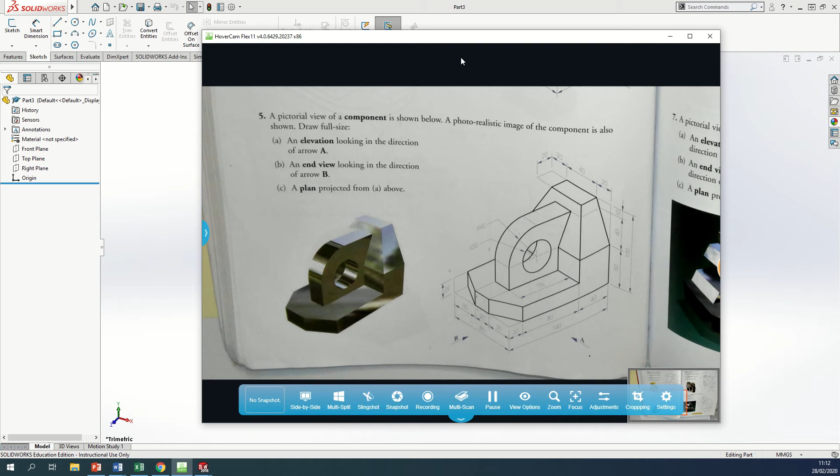Okay guys, so if we open up our book on page 124 and go to question 5, it's an orthographic projection question, and we're going to draw it out in SolidWorks. We're going to start from the base up. We see that the base is 140 by 80.

Over in SolidWorks, looking straight in at the top plane, we're going to draw a center rectangle of 140 by 80. Green tick once we're finished.

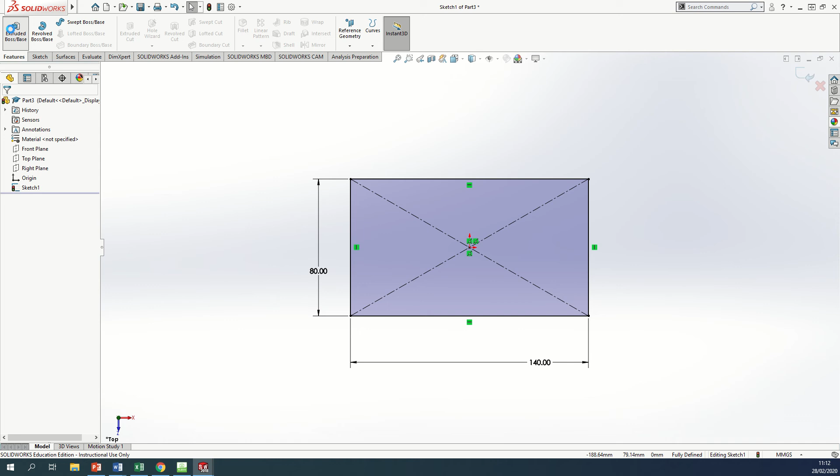Features, extrude up, and if we look at our drawing again, we're extruding up by 20 mil. Green tick. That is our rectangle shape to start with.

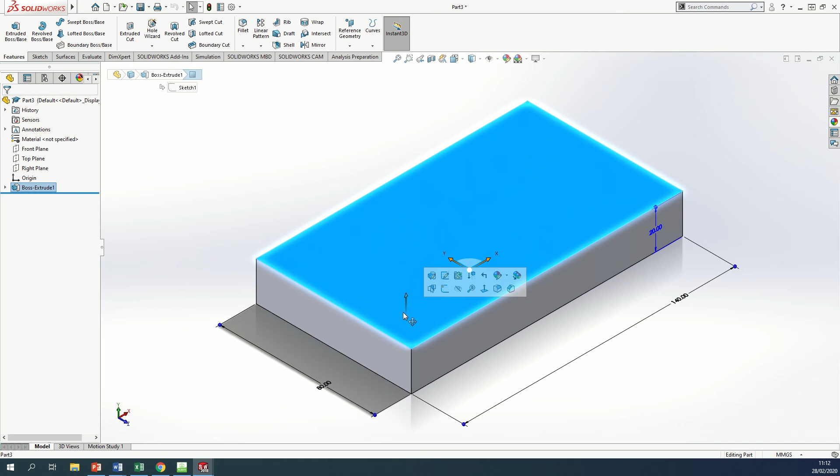The next thing we see here is that there are two corners being taken out. To do that, we have to look straight in at our shape again, and we're going to go to sketch.

We're just sketching a line here, starting from the corner and drawing a triangle. The dimensions of that triangle are going to be 30 at the front on the shorter side, and 20 on the longer side. Green tick once we're finished.

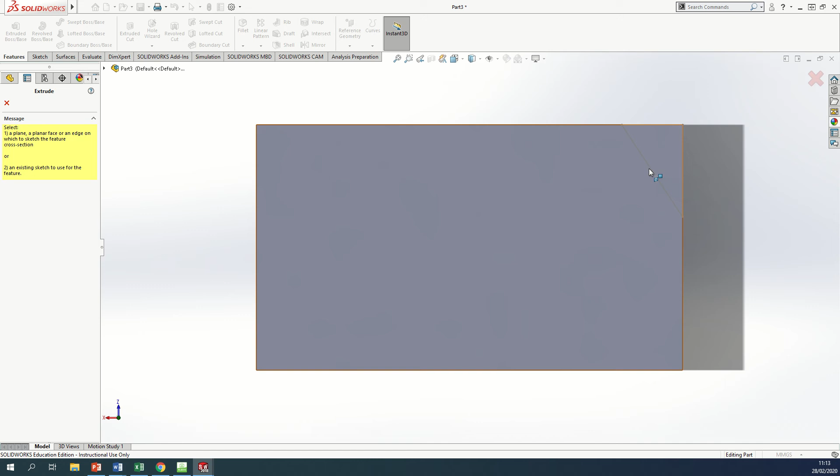Features, and we're going to extrude cut that now, this time cutting through all, so we're going through all of that shape.

Okay, so we've done one side now and we're going to mirror that. So features, mirror the extrude, and we're going to cut along the front plane. Green tick.

And that is our shape so far. Next step for us is to extrude up this rectangle here, so that rectangle now is going to be 40 by 30.

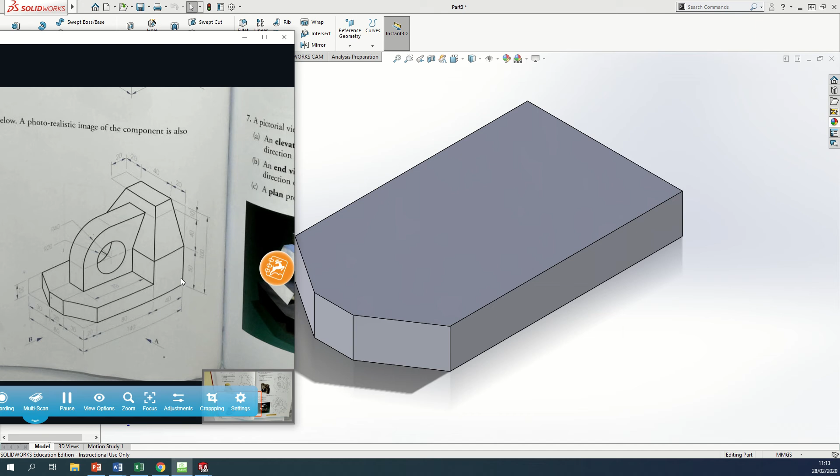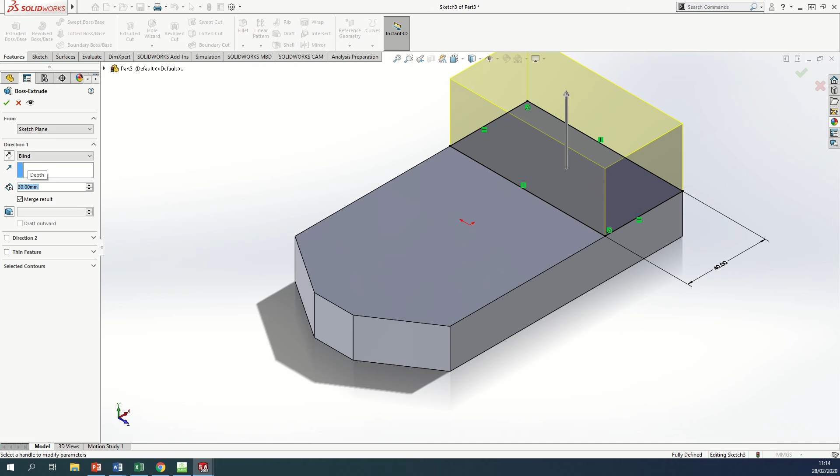So sketch, and we're going to sketch a corner rectangle onto this surface, and the dimensions of that are going to be 40 by 30. Okay, so that's our shape now again.

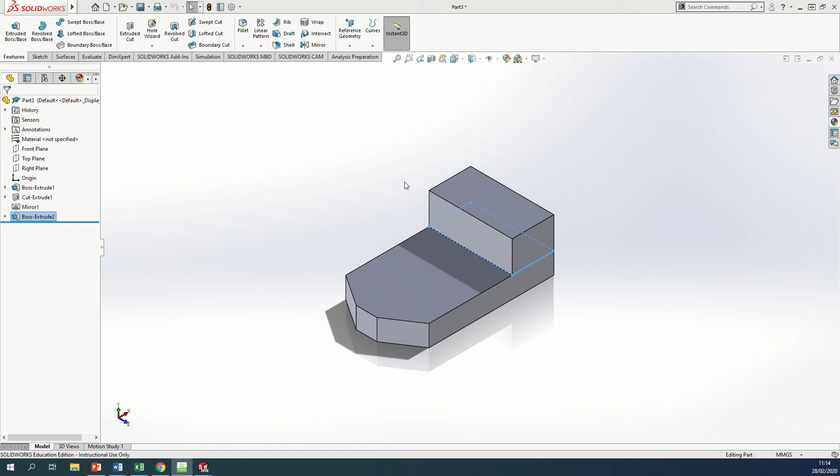The next step for us is to move up here 50 mil and do a plane, and we're going to draw this rectangle on that plane. So we're going to go to features, reference geometry, plane. We're using this surface now as reference, and we want that plane to be 50 mil up. Green tick, here's our plane, and we're going to right click on that and look right in at it.

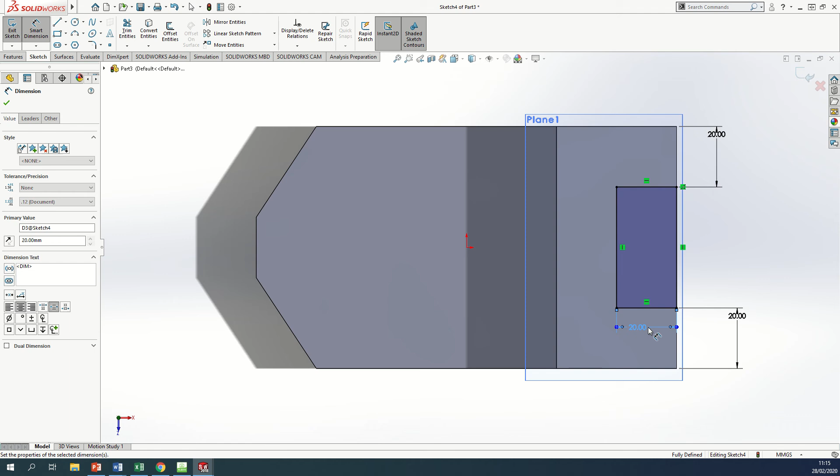On that plane now we're going to sketch a corner rectangle along this line here. The dimensions of that corner rectangle, from this point to this point, are going to be 20. This point to this point is going to be 20 as well, and it's going to be 20 mil out. Green tick, and you can see now that that sketch is just hovering 50 mil above this surface here.

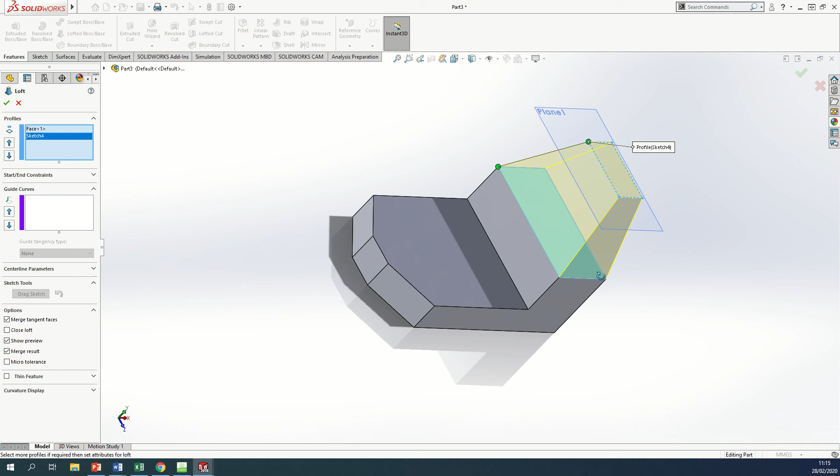Exit our sketch, features, and we're going to loft boss base. We're going to choose this surface and a corner of the rectangle, and we're going to get something like this. This is a preview of our loft, looks like what we want it to look like. Green tick.

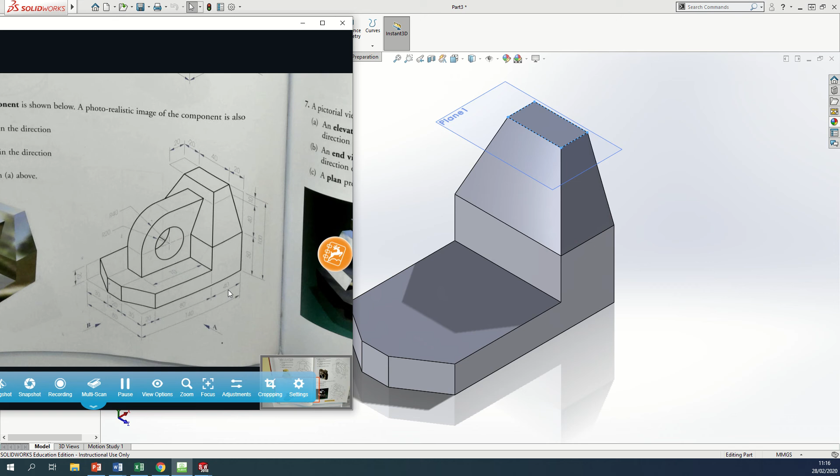The next step now in our shape is going to be drawing this. Now if we looked at our previous video, we should know how to draw this. We're going to have a plane that's going to be referenced off this face, and it's going to come in 20 mil.

So going back to our reference geometry, plane again, off this, flipping our offset. We don't want it to be that side, and we want it to be 20 mil. Green tick, there's our plane. And we're going to go and look right in at that plane.

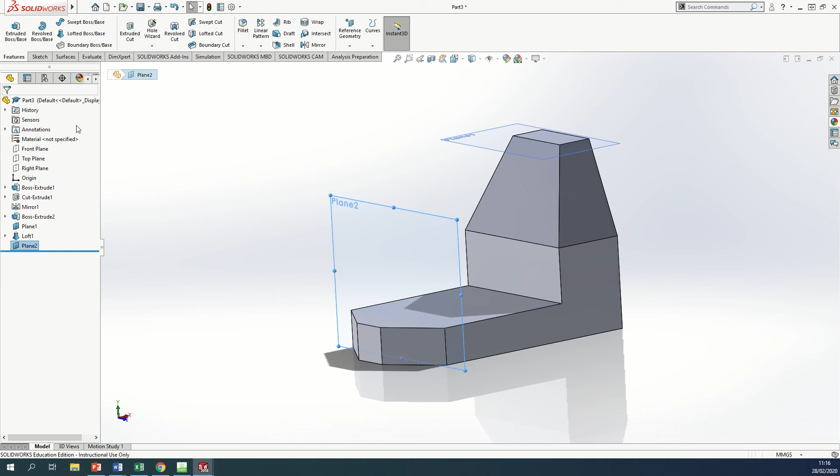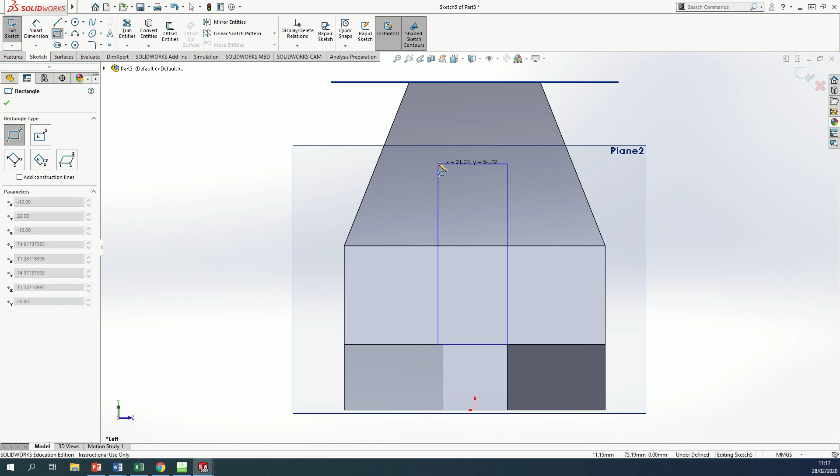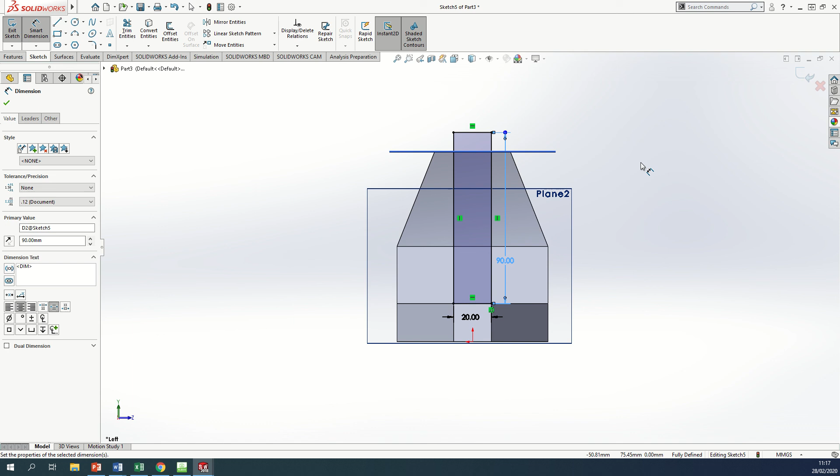Okay, and we're going to sketch onto it, again just sketching in a corner rectangle, and that corner rectangle is going to be in line with this. Smart dimension, 20, by 90. Okay, green tick, that's our sketch there.

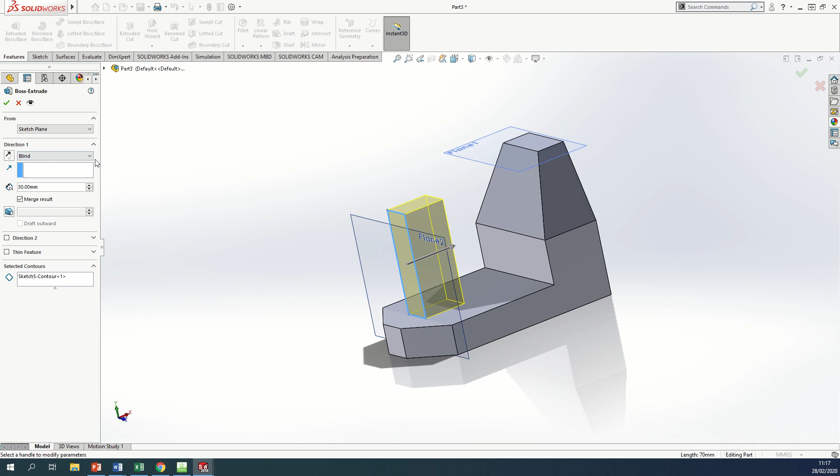Exit sketch, and we're going to go feature extrude boss base, and we're going to go up to next.

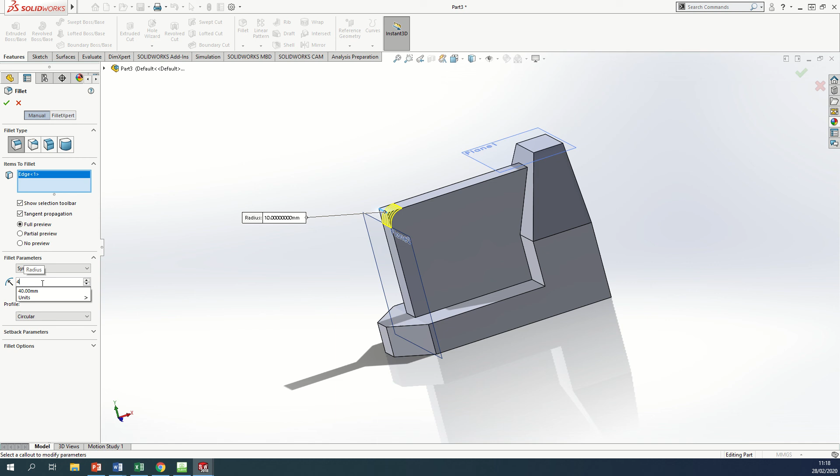Green tick. Next step then is to fillet that, just like the last day, so filleting that now at a radius of 40. So fillet this edge here, and we have a radius of 10, but we want it to be a radius of 40. Green tick.

So right click on both of those planes just to hide them. And the last thing now we need to do is the circle here, the circle cut.

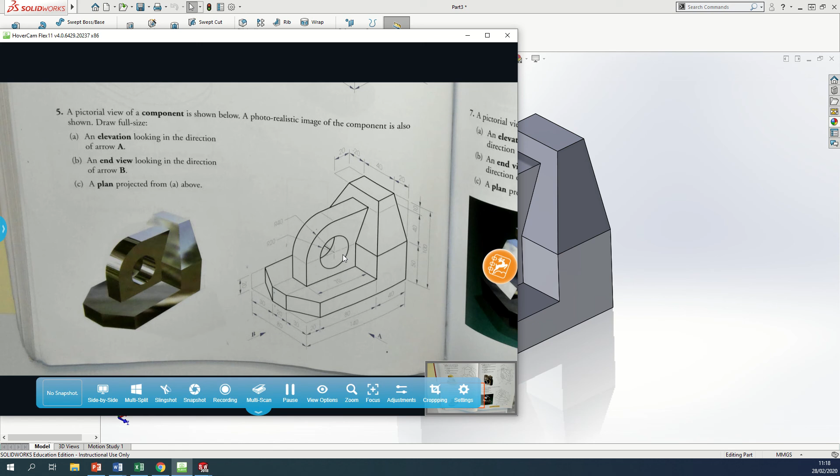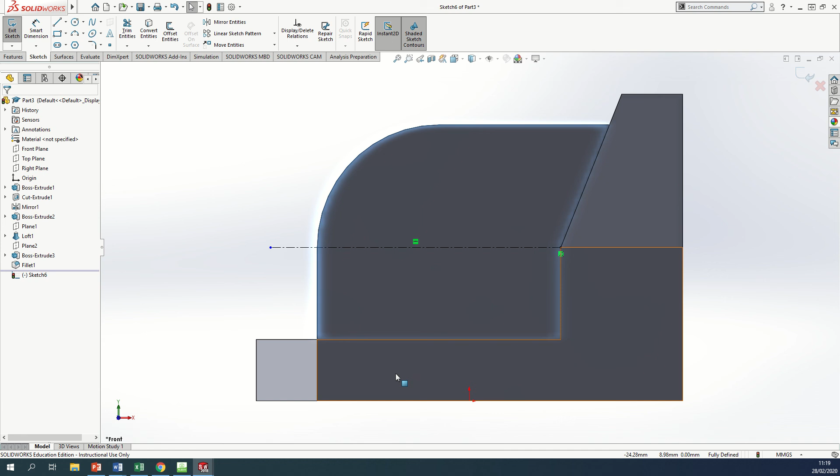Okay, so clicking on the surface and looking right in at it, we're going to sketch on that surface, and we want to sketch a center line to start with. Our circle is going to be somewhere along that line, and the circle is going to be bang in the middle of our shape. So drawing a circle here.

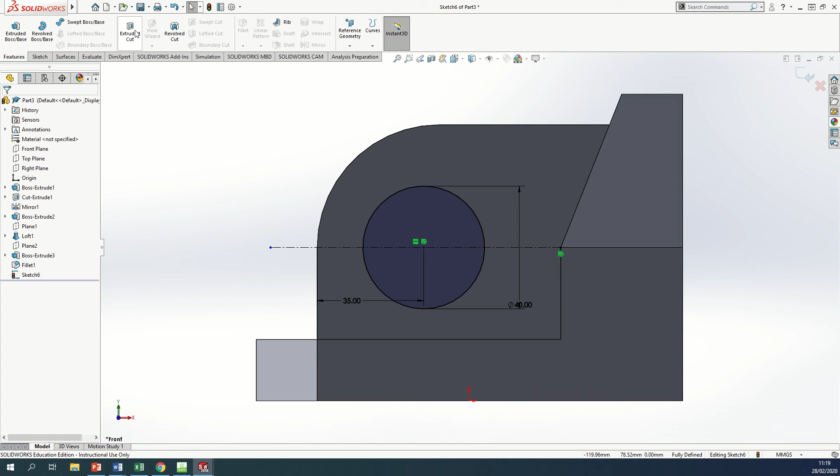From here to here is going to be 35, and the diameter of that circle is going to be 40. Green tick, features, extrude cut, and we're going up to next again. Green tick.

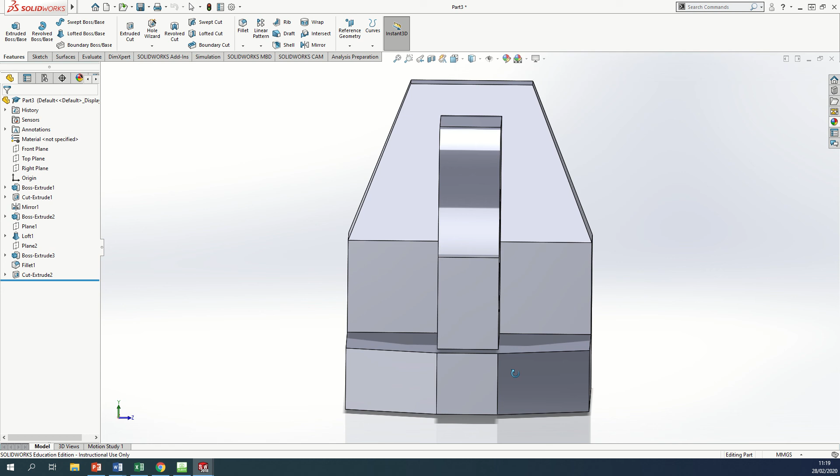So that now is our shape, and we can then colour that, what we'd see in our elevation, what we'd see in our end view, and what we'd see in our plan. Okay.